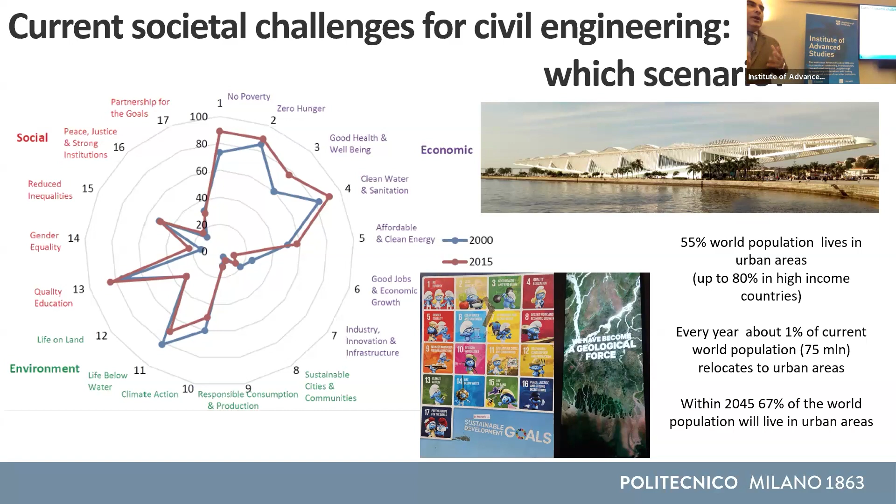And this means that we will require buildings for dwellings, infrastructures for transportation, for moving, and any kind of structure and infrastructure that we need for our daily life. And as a matter of fact, this started quite some time ago. This is the road network at the time of the maximum expansion of the Roman Empire, during the empires of Trajan and Hadrian in the 2nd century after Christ.

And last year in the New York Times, there was this picture. This is a highway junction in Houston, Texas. And this is Siena, a medieval town in Italy, in the picture at around the same scale. So Siena fits in that same space.

Transportation is a big issue. We did not realize how important it is until we were stuck. We were forced to stay at home during the pandemic, or when the Suez Canal was blocked by a ship. And I remember in Italian newspapers it was written: this year at Christmas, no toys, because the ships are blocked in the Suez Canal, and all the toys came through that channel. So this is really something important.

Why did I add the Pantheon? Not just to match with the Roman thing. I always use this picture to address one concept, because when sad accidents happen, we read, oh, the Romans were able to do concrete very well, look at the Roman bridges, and so on. But I used to say that the concept of durability of a material does not exist. We use a material to make a structure. So durability makes sense only if you think of the material in the structure and where the structure is.

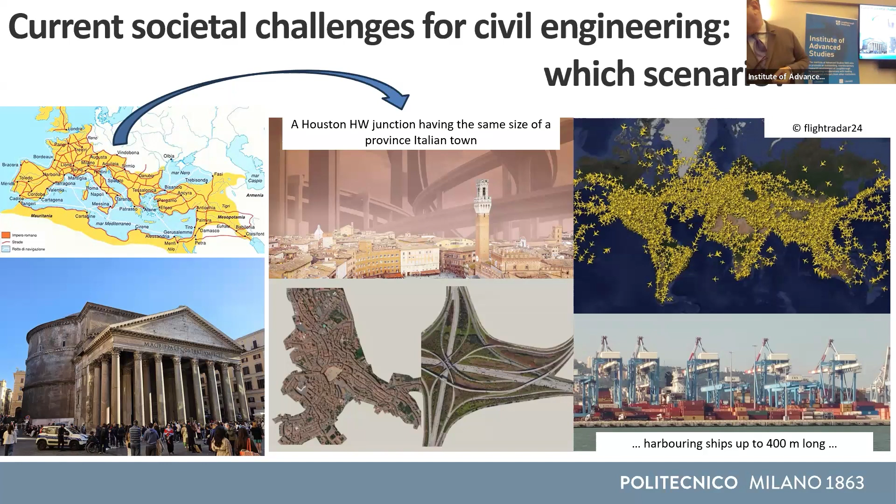But anyway, in this context, whatever the message is, we cannot avoid concrete. Concrete is a fantastic building material. Our need for concrete means that we need to quarry, we need to produce a lot of raw materials, we need to produce cement, and this is a process which has an impact. But really, we should not believe that we can have a real alternative to concrete.

Our colleague Karen Scrivener from EPFL made a study and realized that if we would like to replace all that we do with concrete with timber, we would need a forest surface like that of India every year, which means that we need to replace it.

And the other thing is, sadly, the fires in LA demonstrated that concrete can survive fire. Timber is a different thing. You can design a timber structure so that people survive and can escape, but after that, the building itself becomes part of the fire load. But about concrete, there is a misperception, in my opinion, because we know that concrete is made of cement and cement has an impact and so on. But there was a study.

This study is not very new. It's 15 years old, by a Brazilian group. And they put the compressive strength versus the binder consumption. It's well known that to have a better concrete in terms of strength, you need to put more binder into that, more cement. And the conclusion at this point will be, okay, a better concrete will be more impactful. So let's build with a less powerful, less strong concrete.

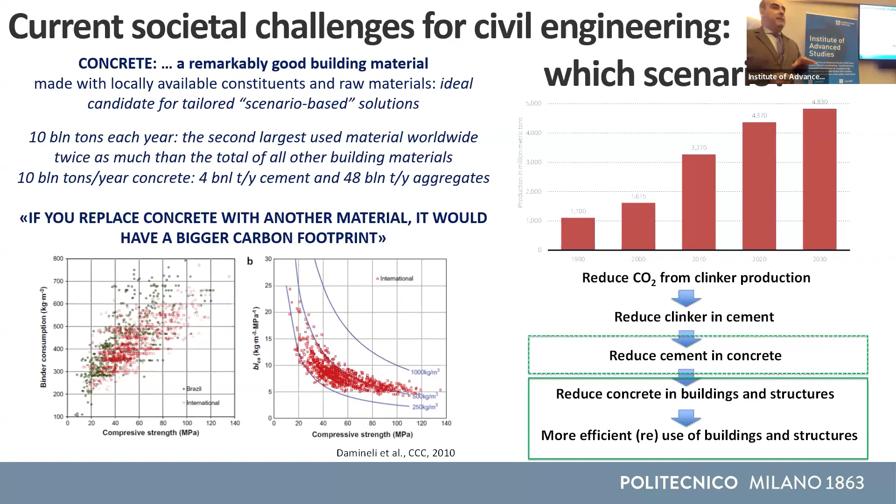We can reduce cement in concrete. We can make concrete with lower cement content. But most of all, if we are going to use concrete with a higher strength, we can reduce the amount of concrete that we use in our structure for the same performance or for even better performance. So this is the context in which we started. These are the topics which I will go through.

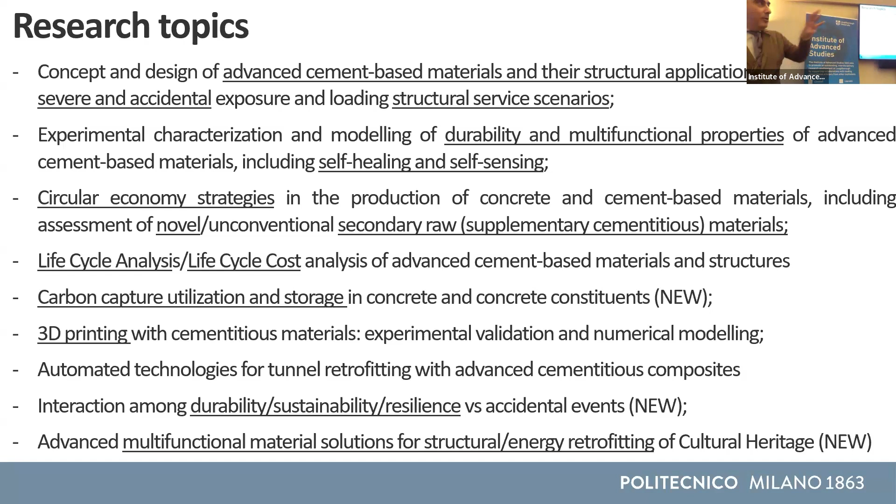We started with this idea in mind with the ReSHEALience project, and we said we want to address product, process, context. Product is UHPC, is well known on the market, and it's advertised for its high compressive strength. At a certain point, I say, from a structural engineering perspective, this higher compressive strength becomes useless because you cannot squeeze the size of your columns below a certain limit because it's no longer a matter of strength, it becomes a matter of stiffness and buckling. And the two properties are not proportional. So what you look for from UHPC is not only strength, it's toughness. And you have to upgrade this to the process.

The other movie was when we cast half a cubic meter of UHPC on a real job site with basically unskilled workers, because that is the way to go. Construction industry is made of medium to low skilled workers. So you need to upgrade their skills if you want to really make the innovation breakthrough.

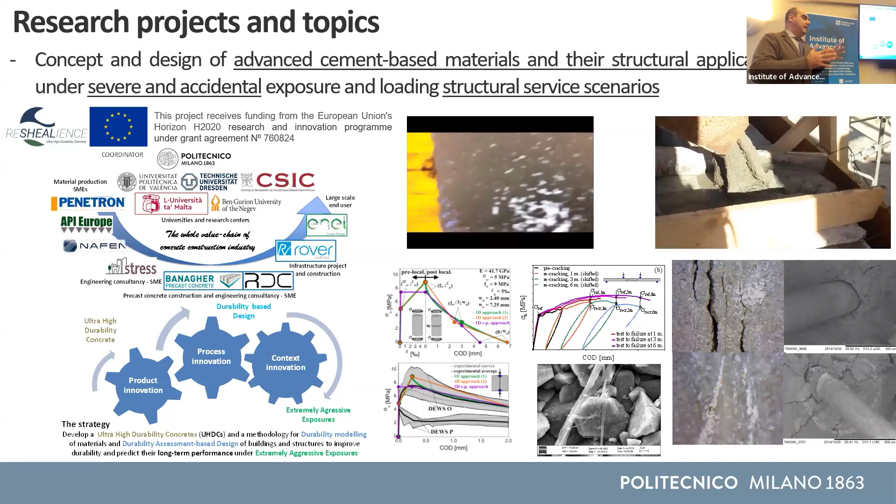But what we wanted to look into, and Anna mentioned it in the introduction, is the self-healing capacity. This is how these materials, because of their composition, because of their engineering mix design, are able to self-heal the cracks, provided that they are in a good environment, which means that there has to be some moisture, basically. So this was what we looked into, and this is what we proved in a job site. This was one of the pilots in our ReSHEALience project.

Very simple one. It's a swimming pool. We use geothermal water. It's not thermal. It's not a spa. It's a water which contains sulfates and chlorides, so very aggressive. But going from ordinary concrete to UHPC, we reduced the thickness from 10 centimeters. You can see inside this is about a 1.5 meter wall, so not very demanding. From 10 centimeters to 3 centimeters.

The other important thing is that the reduction to 3 centimeters was allowed not simply because we changed the material, because if you limit to the material, you go to 6. We changed also the structural concept, not a cantilever wall, but plates connected by, we call them buttresses, because we wanted to remind us of the Romanesque architecture, because really these slabs transmit a thrust to these columns here.

So we changed the structural concept, going to a slab, because the slab is a redundant structure. It can redistribute stresses, it can exploit the properties of this material. So even if, in the mix design, if you look at the cubic meter of this material, you have more cement than in ordinary concrete. But if you compare the square meter of a wall, you see that in this case, 1 square meter contains 35 kilos of cement. In this case, it contains only 18. And even if you add slag, which is a supplementary cementitious material, the sum is still lower than that.

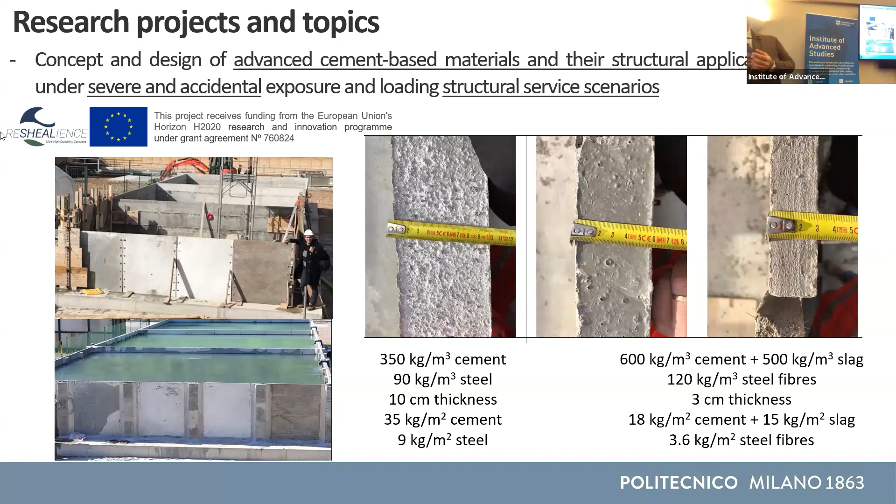So this is the way to look at the use of ultra high performance construction materials, whatever they are. So, okay. The other thing is, okay, we have these materials, but we need to know how to design with them. There are guidelines in the international design codes nowadays, but when it comes to durability, the codes are a little bit lazy on this. The codes on durability are prescriptive. They simply recommend a minimum cement content, the maximum water cement ratio, and ultra high performance materials automatically satisfy this. So how can you compare the benefits if they are all above the threshold?

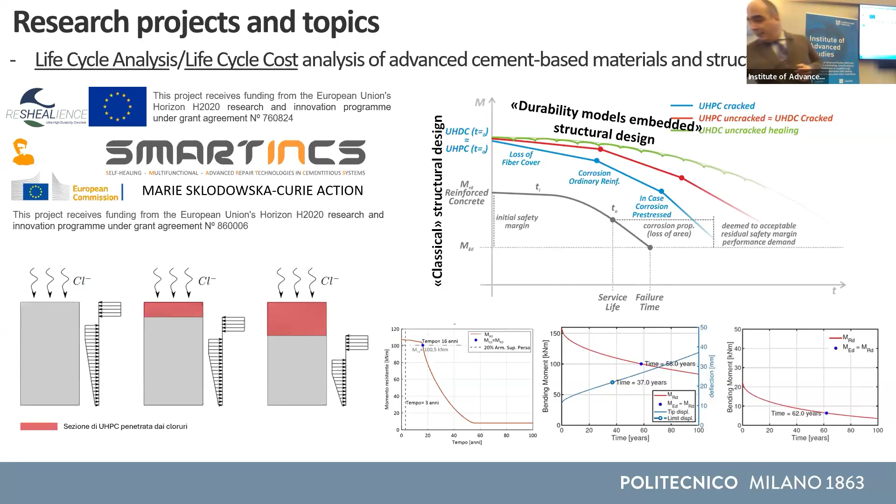So we developed the methodology. In this sense, the multidisciplinarity was quite nice because we were discussing with people in timber design, and we were discussing about fire design. When you design a timber structure for fire, you calculate the time and you calculate how much thickness of timber is burned in that time, and you remove that thickness from the cross section. So we said, let's do exactly the same. If the chlorides penetrate, let's remove that from the cross section, which is a little bit harsh, because then we went and we tested the materials.

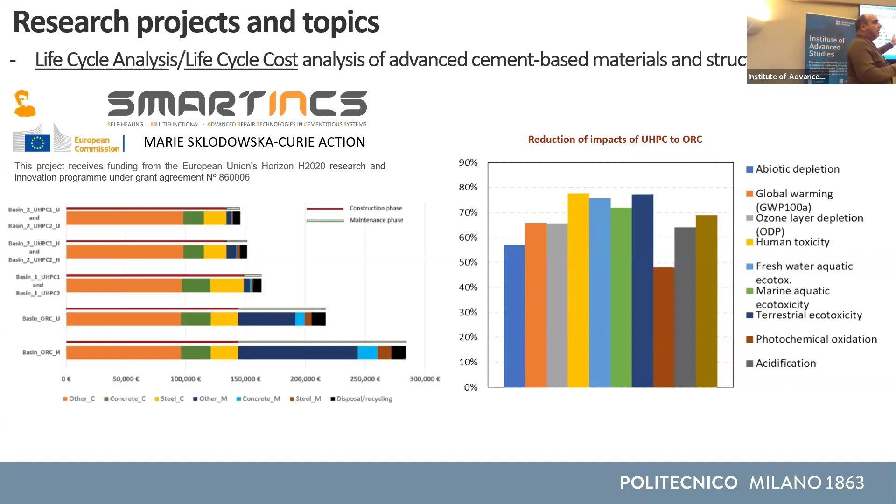But what we wanted to demonstrate with that is that due to that reduction in volume, the construction costs, which are up to here, orange, green, and yellow, in ordinary reinforced concrete or in UHPC are more or less the same. So this is important when you go to real industrial application. You cannot say, oh, we'll save money 50 years from now. No, the return on investment must be reasonable. Otherwise, the innovation will not go to the market. So in that case, we managed with the design to have the same construction cost, and you greatly save on maintenance because of the higher durability.

How can you predict the maintenance? This was the other issue. Most of all, because you use UHPC in most cases without ordinary reinforcement. So if you think of the model for corrosion, you do not have a bar which corrodes there, so you cannot apply this model. So we investigated the long-term performance with experiments and modeling. I will not go into the details. We also used a little bit of AI, because we had a good database of, I think, more than 750 cracks that we could scan. So it was a good database to train our own model. The paper was just published yesterday. Our student was very, very happy about that.

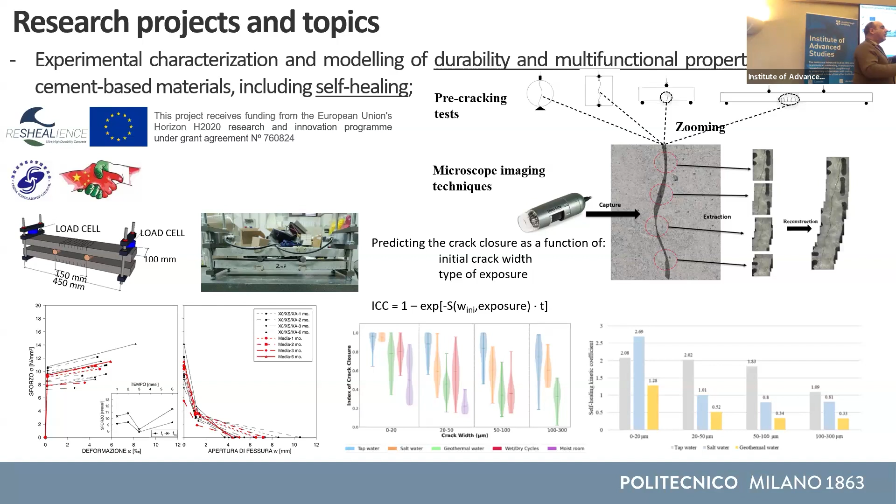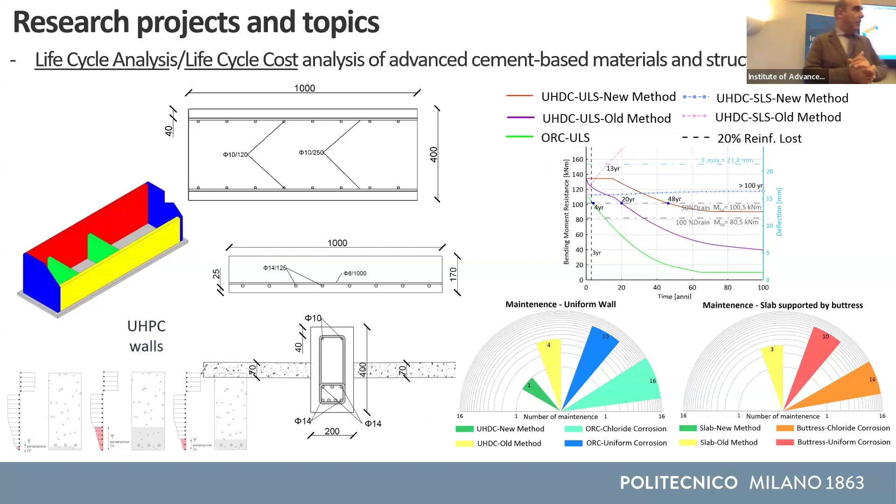So we developed a crack closure law, and we used this in the models, and through the evolution of the performance over time we were able to track the maintenance. So, for example, for the structure with the slab supported by buttress, if we used our approach, we had no maintenance or a maximum of 3 maintenance interventions compared to 10 to 15 in an ordinary reinforced concrete structure. So this was the methodology that we developed to calculate the cost.

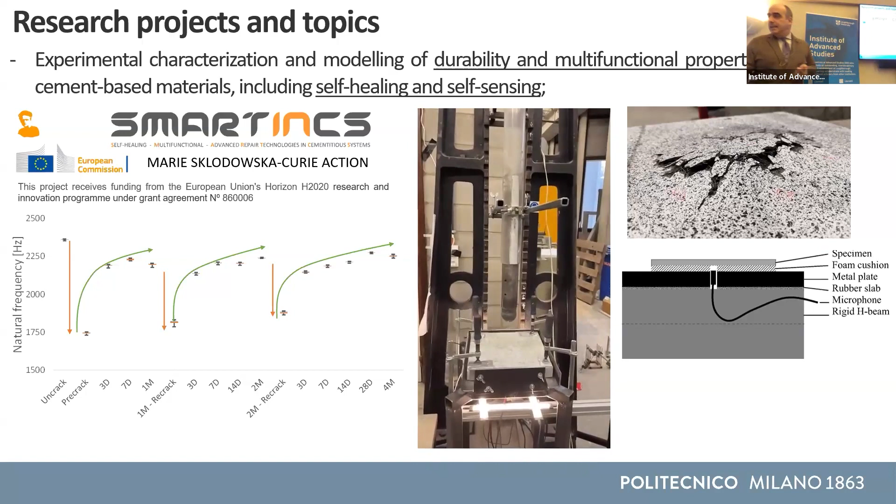And then we went further. For example, we investigated how these properties apply to impact, if you want to use them for protective structures, how the material is able to recover its properties, and how these materials survive higher temperature. This is particularly important for nuclear containment secondary vessels, which can be subjected to up to 300 degrees constant temperature. It's high, but not extremely high. So the material still keeps its performance. We heated the material up to 200 degrees, these ones here, and after curing them for 3 months, the material was able to close back the crack. So it's able to survive with this activity.

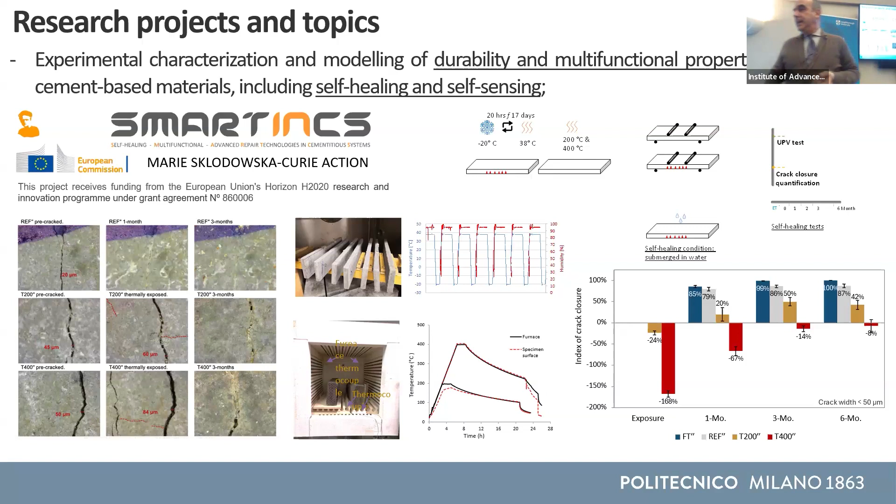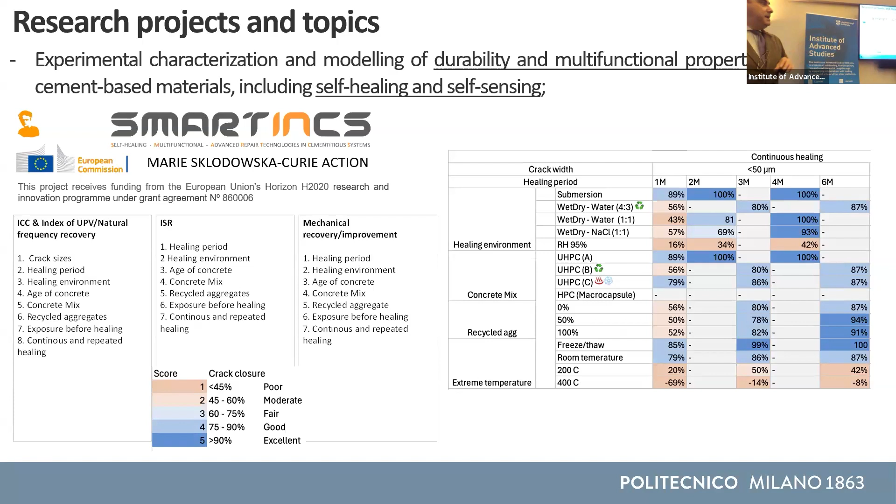We investigated freeze and thaw as well, and we tried to come up with a design matrix to address the choice of the best material for the best application. Ending up, I spoke about nuclear, so the transition towards the energy world was a little bit natural. And we looked into, well, this was still the European Union with 28 countries, so this survey was before Brexit. This is the energy mix for all the European countries.

So we still depend, it's some years ago, we still depend on coal for 10%, but there are countries like Estonia and Poland which depend on coal for 40–50%. So how can advanced materials help in the energy transition?

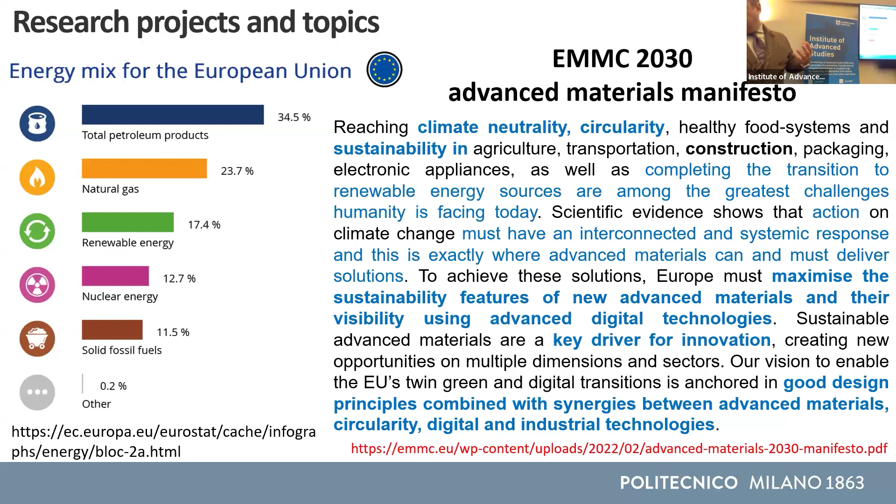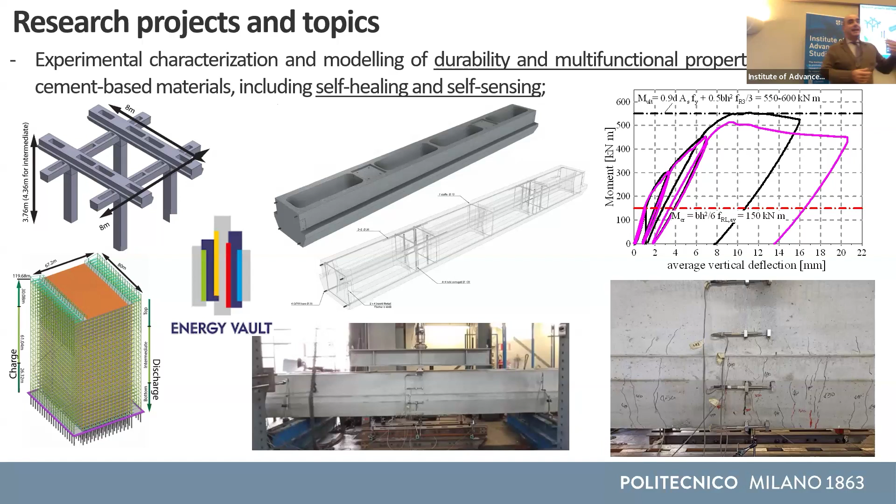So they ended up with this design here, which can only be made possible with fiber reinforced concrete, actually, because you can see here, you just have four regular bars, and some stirrups also here where the columns will be supported. Without fiber reinforced concrete, you cannot make this possible. You cannot have this design, and the fibers take up 50% of the total capacity. But obviously, in this case, you also need to deal with fatigue. You need to understand how these materials behave in fatigue.

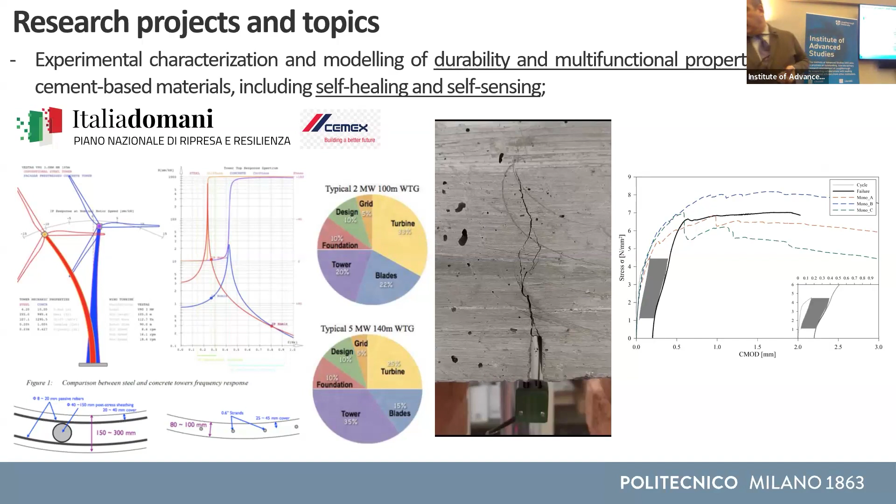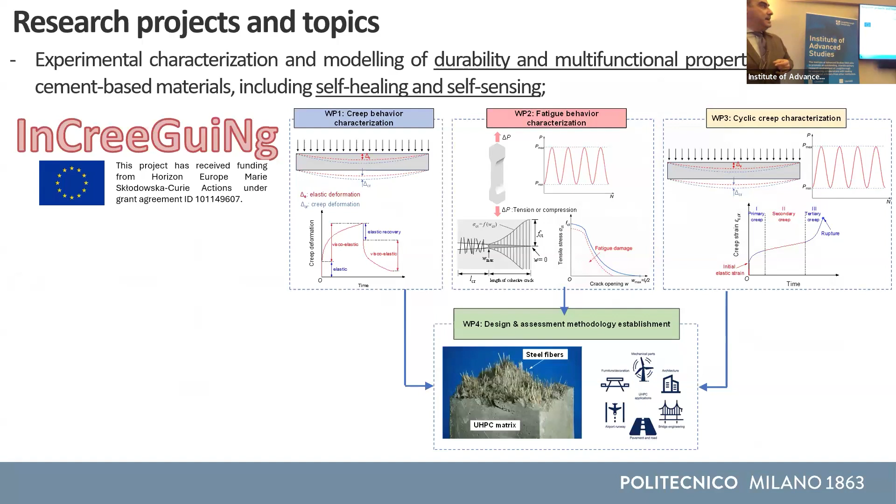So you see, we made some fatigue testing of the fiber reinforced concrete, because another application is wind towers. If you want to go higher to harvest better energy from wind, the problem becomes frequency dominated. So you have to uncouple the eigenfrequency of the rotor from the eigenfrequency of the structure. And a concrete structure is a good solution for this. So for this reason, we have also studied how this material can recover its natural frequency, its stiffness, and we are going to start in a couple of months. A Marie Curie fellow will come to Politecnico just to study these things.

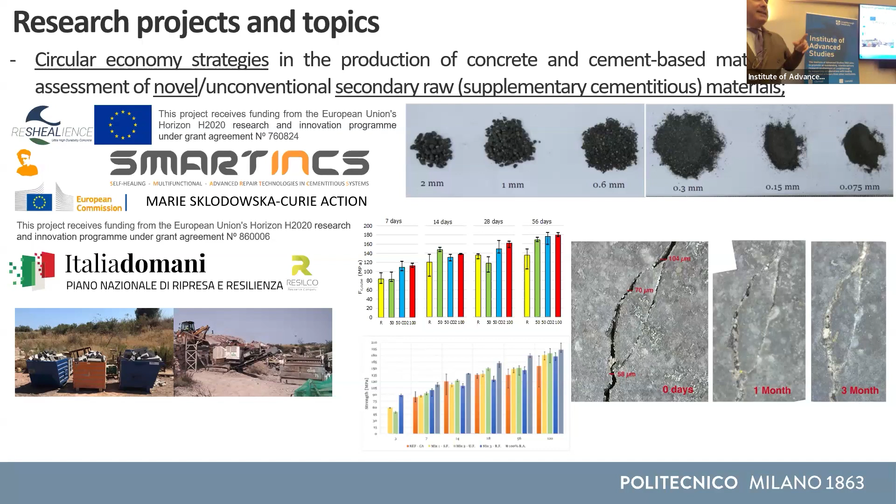Another thing was circular economy. I will not go deeply into that because Estefania will talk about this, but we investigated it in our project. We said, as a joke, we are a zero waste project. So we recycled all our specimens. We made new UHPC, and we demonstrated that it's possible to keep the performance, to keep the self-healing capacity, and if you have the possibility to recover the fines, also to reduce the amount of cement that you put in the new concrete.

But still related to energy, if we are going to abandon coal, we are going to miss an important constituent of advanced concrete, which is called fly ash. So we have to find alternative fly ash sources. Nowadays, steel is no longer produced from blast furnaces. We produce it from electric arc furnaces, and the slags are different. So are those slags equally good to be used in concrete?

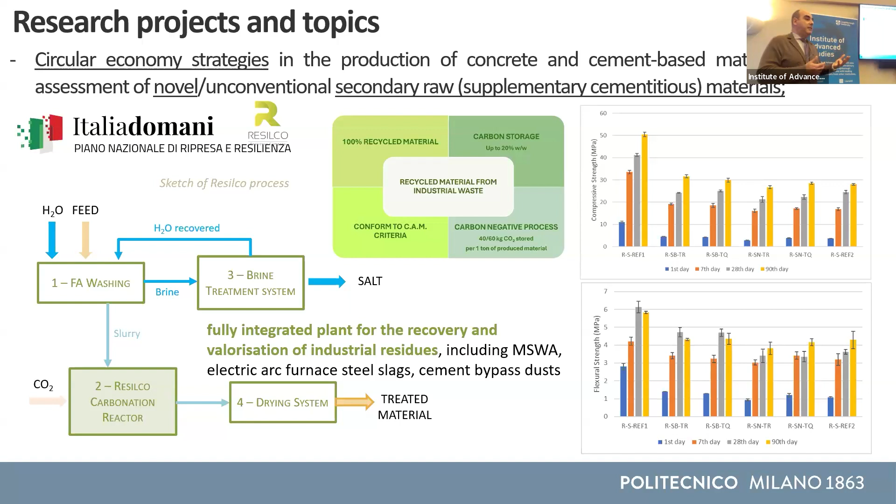So we have started this project with the company. They work with municipal solid waste incinerator ashes, and they use them also as carbon sinking. And the issue is that you need to adjust the properties, because they can be different from the conventional, traditional coal fly ashes that we are used to nowadays. And this also was dictated by, probably Estefania will speak about that.

What does energy transition mean? We were in this project funded by the Research Fund for Coal and Steel. There were Polish partners and also UK partners, University of Warwick, University of Exeter. If we close the coal mine, what does it mean? It means that we have to handle a waste stock like that. That is a mine near Katowice in Poland. What do we do with that material?

And there is also the handling of the subterranean cavities, because you cannot simply close it and go away and forget about it. If you don't use it, you need monitoring, Wi-Fi connection for the wireless sensors that transmit the information and so on. So we try to recover these wastes. There are problems in handling those wastes. They are naturally occurring radioactive materials, so you have to understand how to handle them, how you can recover them.

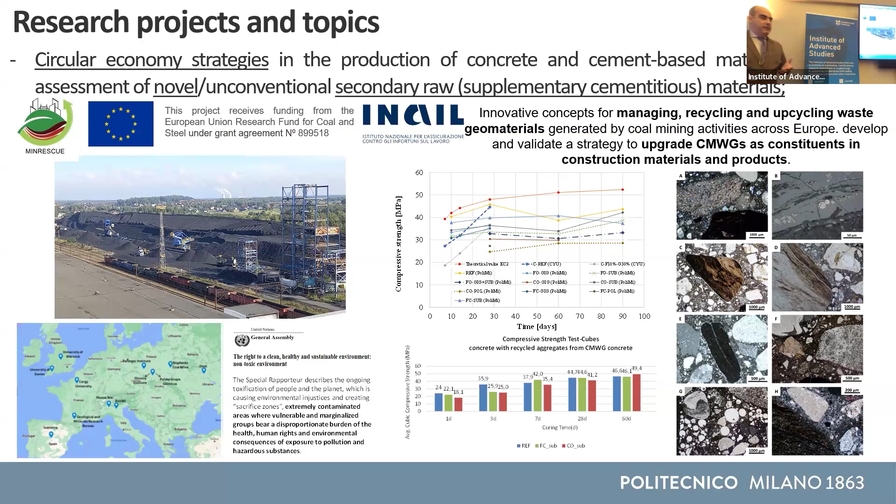But we realized that if you lightly cement them first, and then crush this mixture and use it as aggregates in concrete or in road bases and so on, they give you a good performance. So this was a possibility that we have.

Another project we are involved in is with this company, Resilco, which is partially funding a PhD position, on the carbonation of the slurry, because it's a way in which you can really control the carbon dioxide that you inject and it remains fixed, because in most of the processes that are nowadays advertised, you know what you pump in, but you don't know what goes out.

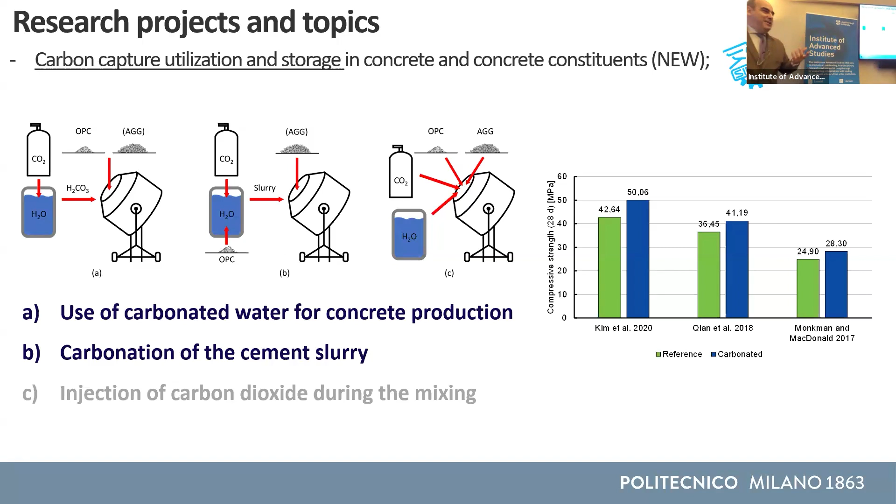If you have sparkling water and you slightly agitate it and you release the bottle, your carbon dioxide goes away. I always do that because I don't like too much sparkling water, so I want some carbon dioxide to do that. And then we also went into 3D printing.

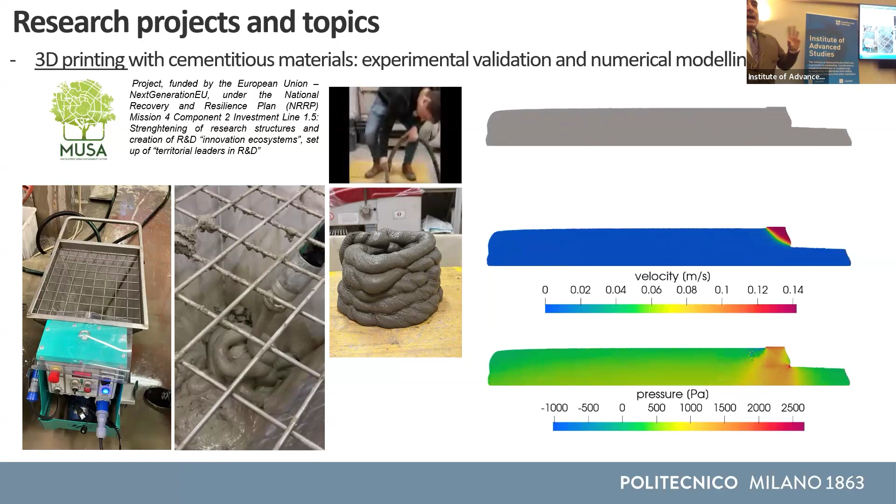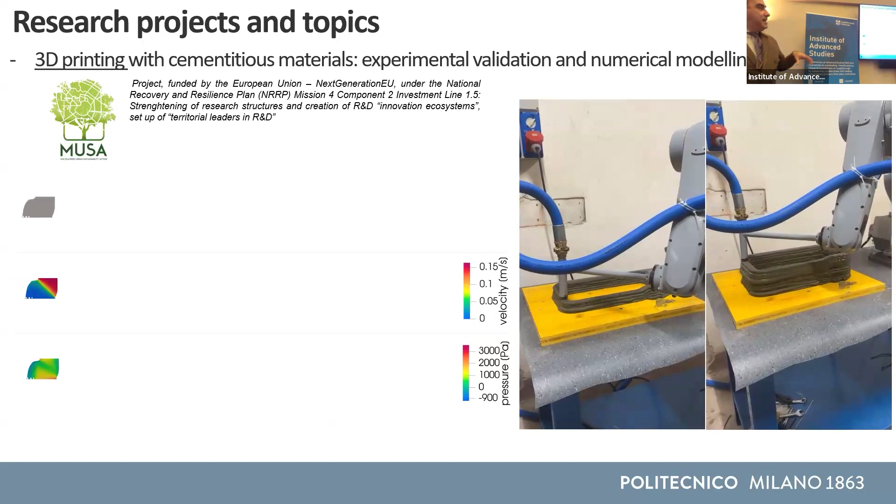Our early attempts were obviously a little bit of... develop a particle finite element based codes to model and design the engineering printing process. And finally, we were able also to set up our own 3D printing lab. First nucleus was a robot, but we kept on developing our 3D printing tools.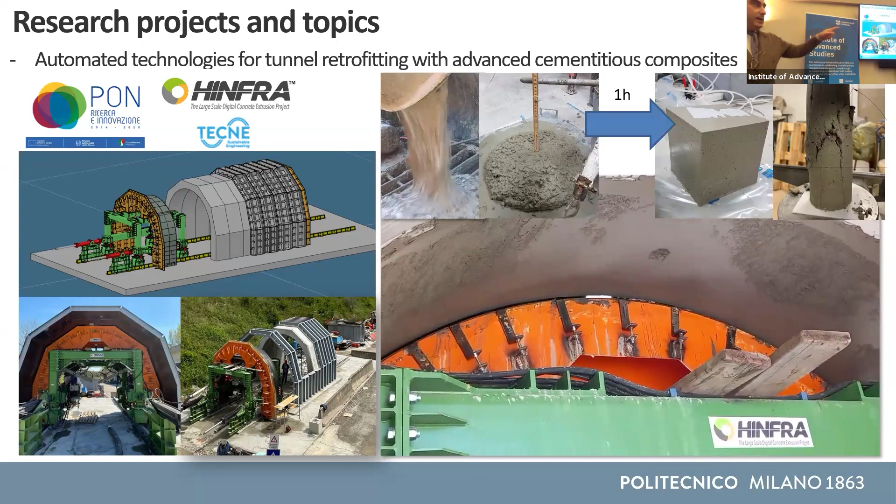There is this slip forming unit. You pump at time zero a self-compacting fiber reinforced concrete mix, and after 1 hour you are able to slip form. So the vault is able to withstand and develop a compressive strength of about 8 megapascal in 1 hour in order to be able to stand that.

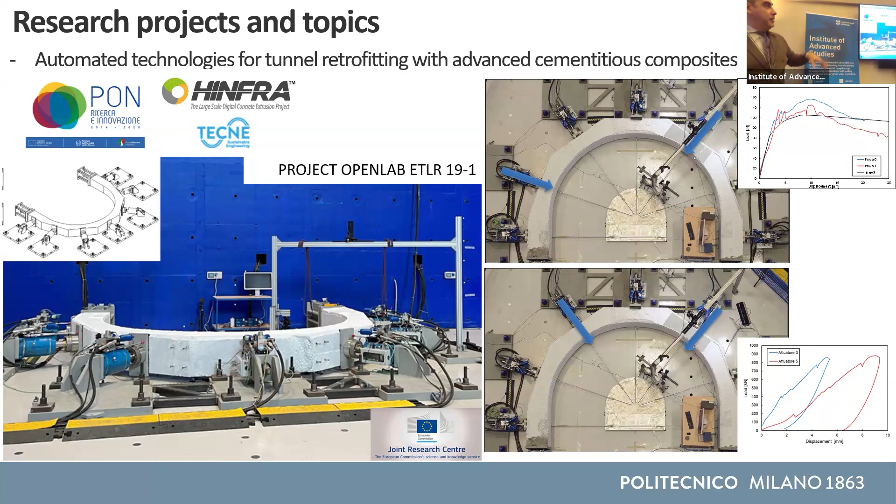And in order to bring this to the real application, we had to validate it with real scale testing. So these are 5-meter diameter mock-ups of tunnel vaults that we tested in different load combinations in the JRC lab of the European Community near Milan. We analyzed the cracking. This is only fiber reinforced concrete.

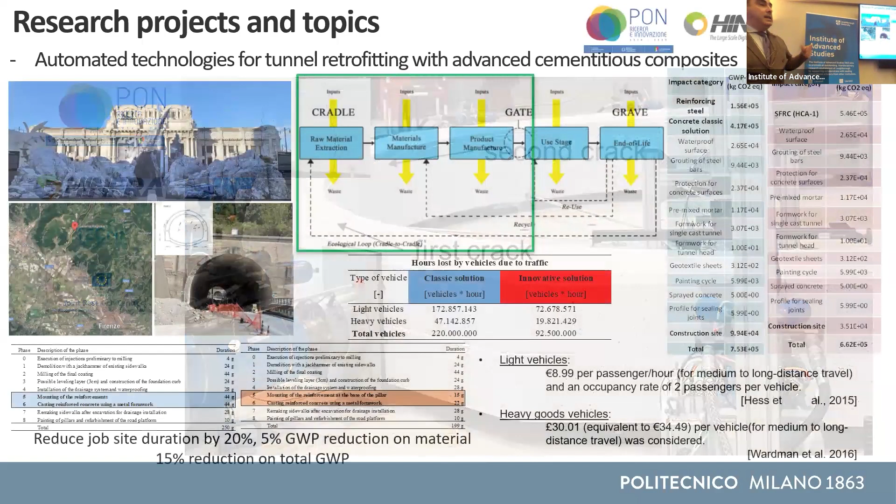And we went to a real site. This was about a 150-meter tunnel on the highway. We demonstrated that using this technology, we saved 2 months on the construction site time. The material was not so dramatically different in terms of impact, because you see, if you compare the global warming potential of this material, and you sum up concrete and steel in the classic solution, you have a saving which is about 5%.

And sometimes if you go for 5% saving, you say, oh, is it really worthwhile, all this complicated process. What was interesting was that over 8 months, we went down to less than 7, or just 6.5. So this saving was the key driver for the innovation, because for a stakeholder, okay, you close the highways 2 months less, you keep the workers 2 months less on the road, you avoid 2 months of vehicles in the

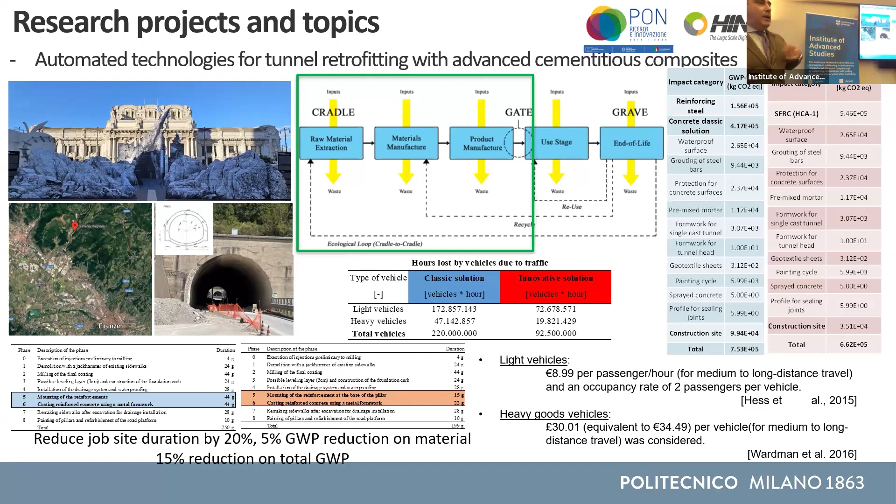queue and so on. And nowadays, what we are trying to understand: can we correlate to the rate of fatal accidents that are on a highway because of the reduced construction site? So the social impact of the innovation in material and in structural engineering. These are the last slides.

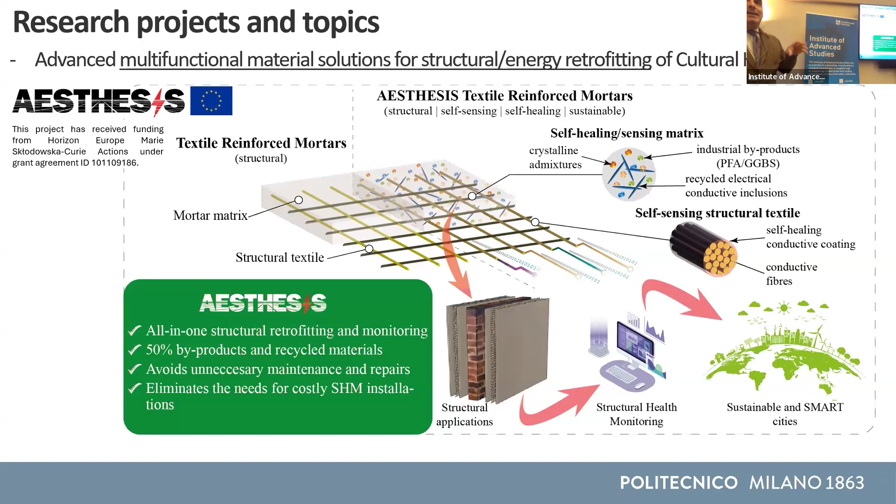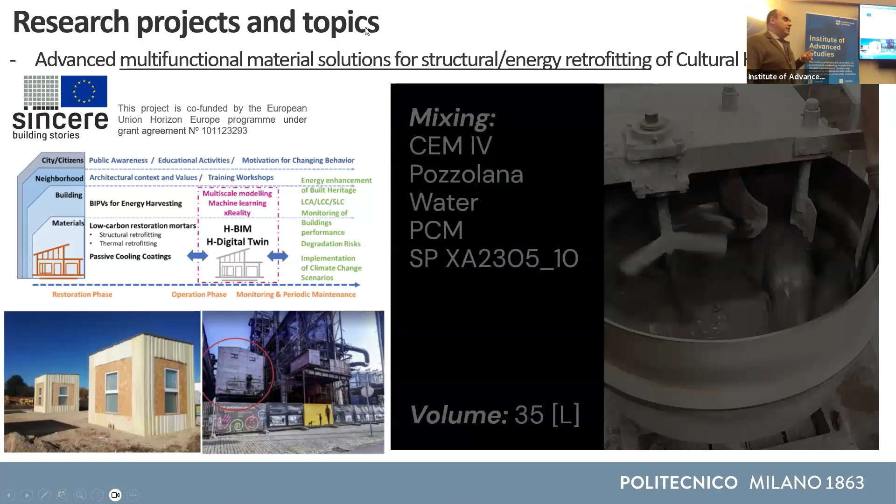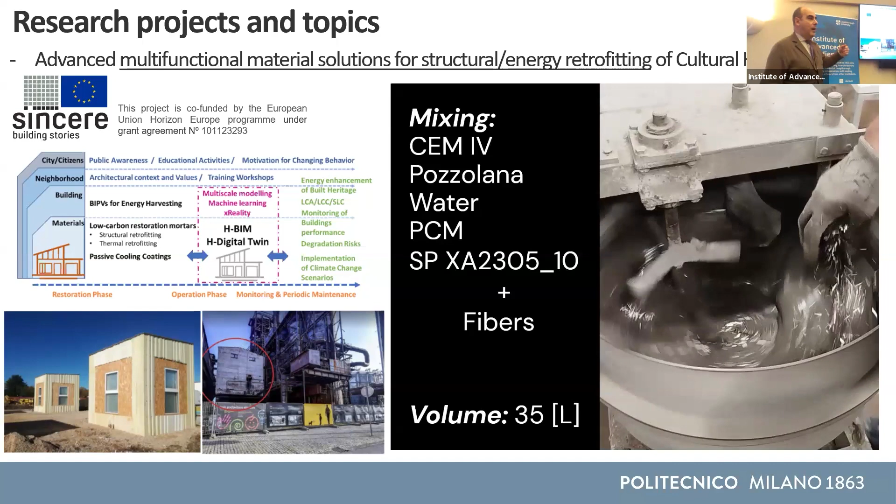We are trying from that experience now to embed in our retrofitting material self-sensing capability, so providing some conductivity to the material so that the material itself becomes a sensor. And we are now going to produce these materials, these UHPC, using CEM IV, using natural pozzolana, using amorphous alloy fiber, so trying to go lower on the embodied carbon footprint from the material, and try to incorporate phase-changing materials. We want to use this in the retrofitting.

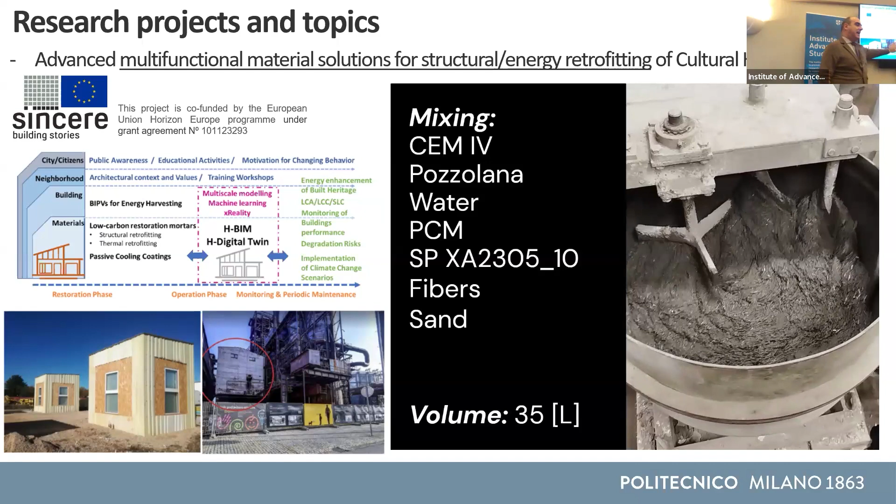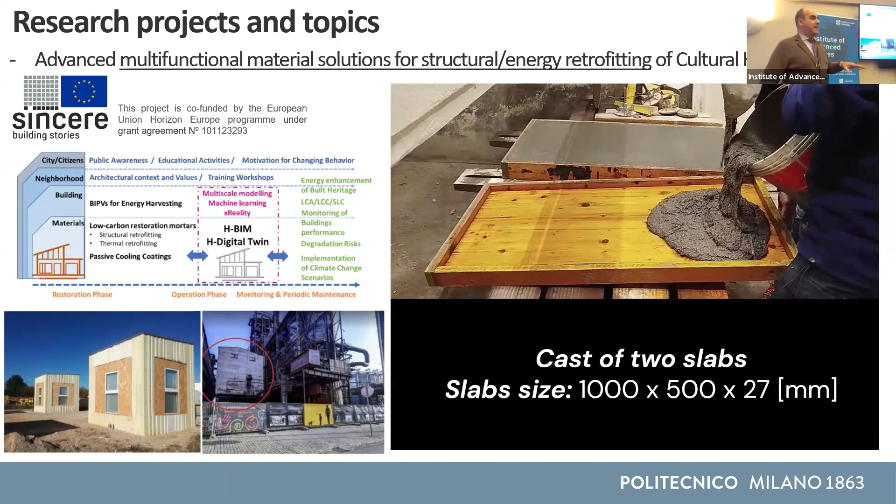This is a fantastic site in the Czech Republic. Ostrava was the oldest blast furnace in the Habsburg Empire, and it produced steel for the Trieste naval yards. So the story is fantastic. There are some buildings which date back to the early 90s, which are in concrete, that we want to retrofit, and we are going to test them in these houses.

These are in Madrid from one of the partners of the project. So we want to mix up the concept into that, and the movies from the first experiments that our students did in the lab. Going to retrofitting and to new material, I think this is the very last slide, or more or less there. We had a case study.

This is a water treatment plant in Genoa. It's located here. The airport is here, and this was a former steel factory now abandoned. So the environment is close to the sea. There is acid attack from the environment. So it's a multi-attack exposure site.

We use advanced materials for the design of this water treatment plant. You can see there a structural model. But what we wanted to understand is, if we use better materials for this structure, which has a longer durability, then we try to predict how the durability changes the structural performance, how this structure will respond to an accident like an earthquake with a certain return period, and what this better performance means in terms of the survival

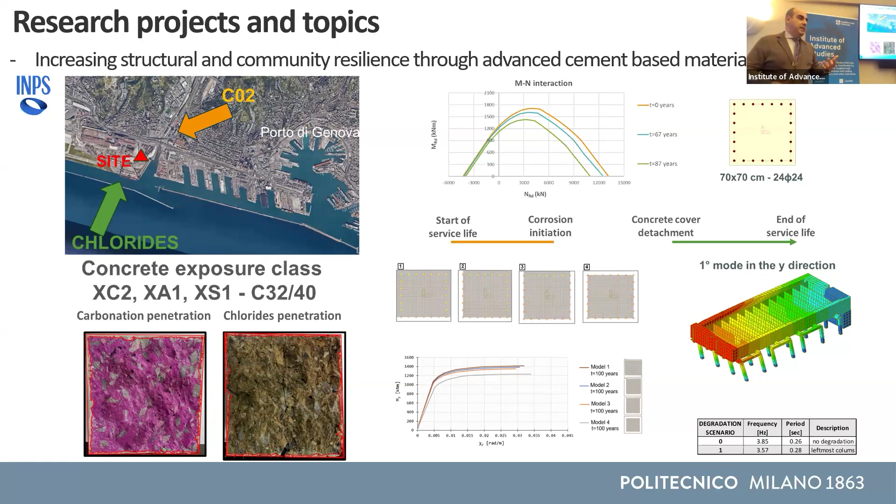capacity of the structure, and then, and this is the point where we are now, how does this impact the promptness of recovery from the disaster of the whole community? Because this is a water treatment plant, so it will affect the possibility for a community which is hit by the disaster to have this essential service.

Well, this is all on the technical part. There is also the social part. We went to the first New European Bauhaus fair some years ago in Brussels to showcase some of our innovations, and these are some pictures of the research group at the last RILEM Spring conference that we held in Milano in the former stock exchange place. These are some pictures from the project meetings that we had in the past in Valencia, Milan, that was Athens, I think that was Paris there.

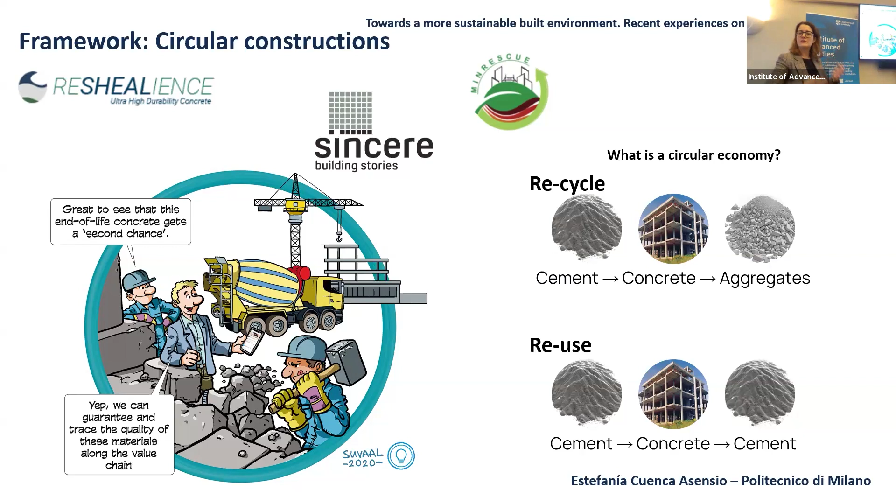but in a sustainable way. So what we can do, for example, in a framework of circular economy, we have worked with these projects, ReSHEALience, SINCERE and MINRESCUE. So we can recycle and reuse. So we have cement and we produce concrete, and then from concrete we can get aggregates, or also we can reuse this kind of concrete to produce cement, crushing the concrete and proceeding with the sieve and so on. So let me explain to you a couple of experiences in terms of that.

So, we started with the European project ReSHEALience, producing an ultra-high performance fibre-reinforced concrete, and obviously, as you can see here, with the reference mix, the amount of cement is really high. But in terms of sustainability, we are using a lower volume of concrete. So it's interesting on this side. We have produced several kinds of mixes, as you can see, the 50 and 100. And what does it mean? It's that we have produced concretes replacing part of the aggregates.

So, for example, in the reference mix, you can see that we have used around 800 of aggregates per cubic meter. But in this case, we have replaced half of the aggregates with recycled aggregates. And in this case, all the aggregates have been completely replaced. But today I want to focus only on this, because it is particularly interesting: we have two mixes and we have also reduced the quantity of cement. So in terms of sustainability, it's really interesting because we have used a lower quantity of cement.

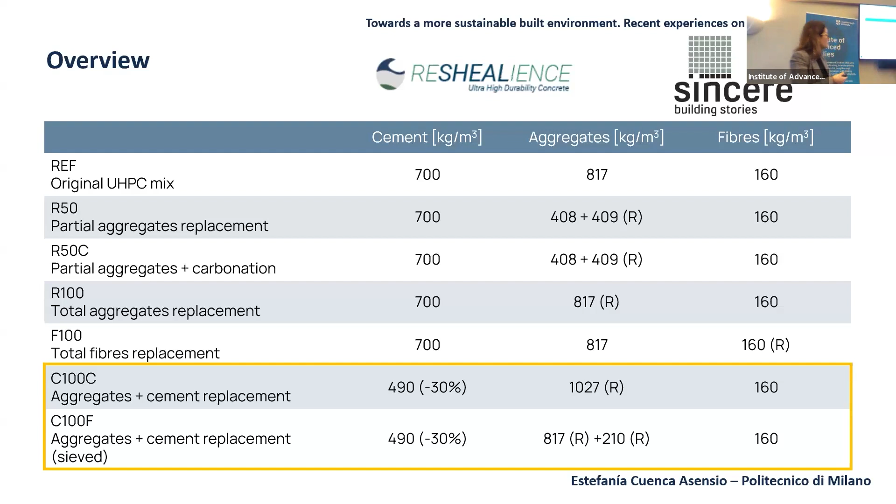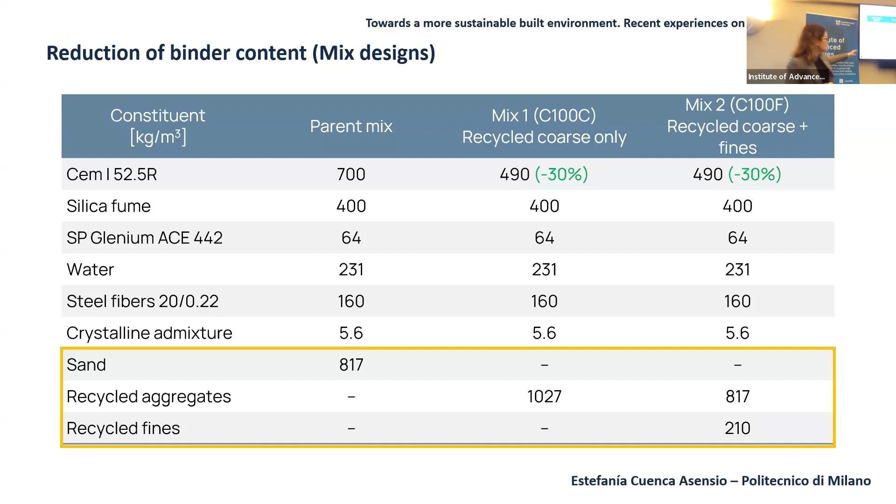So here you can see the mix design of these two concretes. And here you can see better the quantity of sand, the recycled aggregates, and recycled fines with reduced binder. And this is the experimental program. I'm trying to explain in a way for those people that are not so familiar with these things. Concrete has the ability to repair itself, that is self-healing, and self-healing is really interesting in terms of durability because by repairing itself, the maintenance over time of the concrete structure is less, so it's more sustainable in this sense.

So, to study this, what we do: concrete has this property to repair itself, so we pre-crack the concrete and we observe in two views. First, how the crack seals and repairs, but only on the surface, by means of a digital microscope, taking pictures before and after the healing curing periods.

And also we perform another test that we call the sorptivity absorption test. This is particularly interesting because it allows us to analyze and quantify how the crack is cured and repaired in depth, also in the inner part, not only on the surface. And for sure it's also particularly interesting from a mechanical point of view.

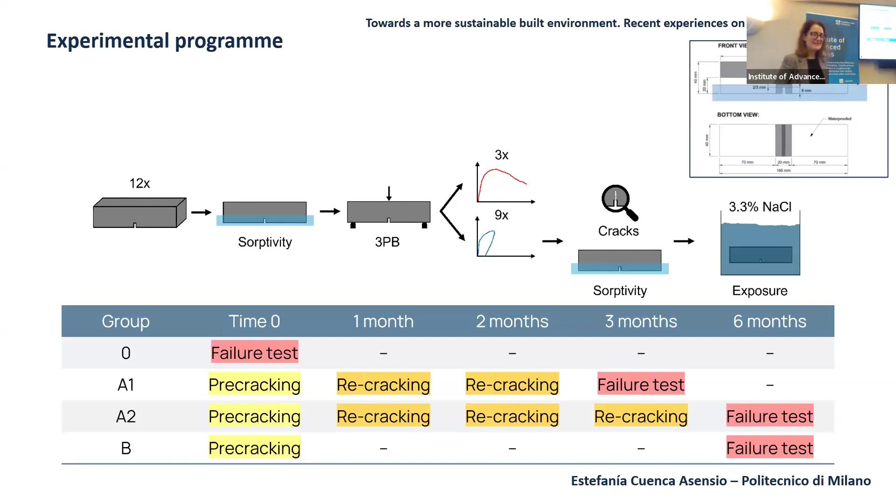So we analyze another process: we pre-crack all the specimens with a classical 3-point bending test up to, in this case, 150 microns. Then we immerse the specimens in a chloride solution in order to promote the self-healing in a chloride environment. And after 1 month, we recrack again. Then after 2 months, recrack again, 3 months, recrack again, and also at 6 months. So a lot of recracking. And how does it work?

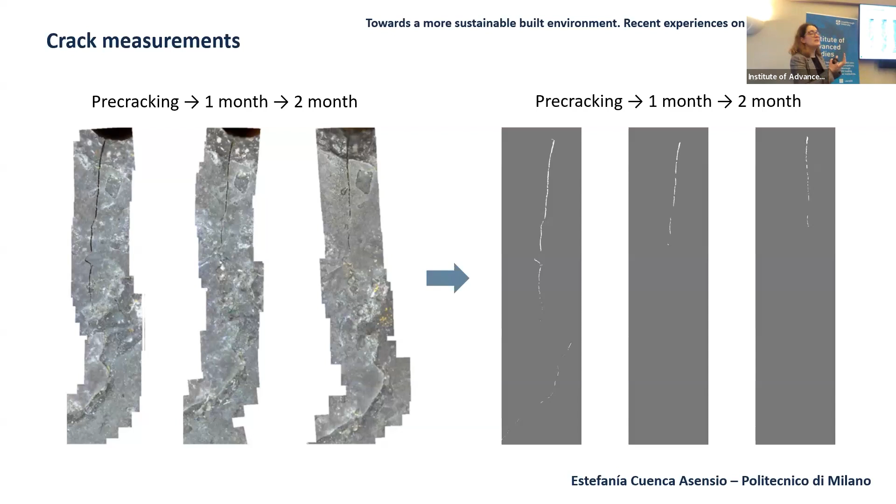So, we take pictures with the digital microscope, and we merge the images with Photoshop. And here you can see the evolution of the crack. This is completely open because it's just after pre-cracking, then after 1 month and after 2 months. And then with binarization, quantifying the pixels, we have the area after pre-cracking and after several healing periods.

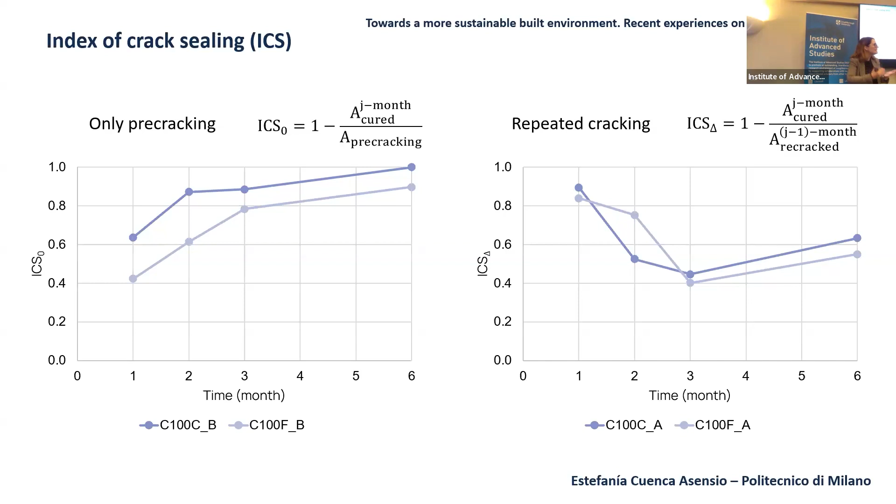As we expected, on the right we can see the graph of the evolution of the repeated cracking. If we are repeating this process, cracking, healing, the behavior was worse. And this is quite interesting also because here after 1 to 3 it is decreasing, but then we have a slight increase. Why? That's because we have 3 months of curing, a not so short period of cracking healing.

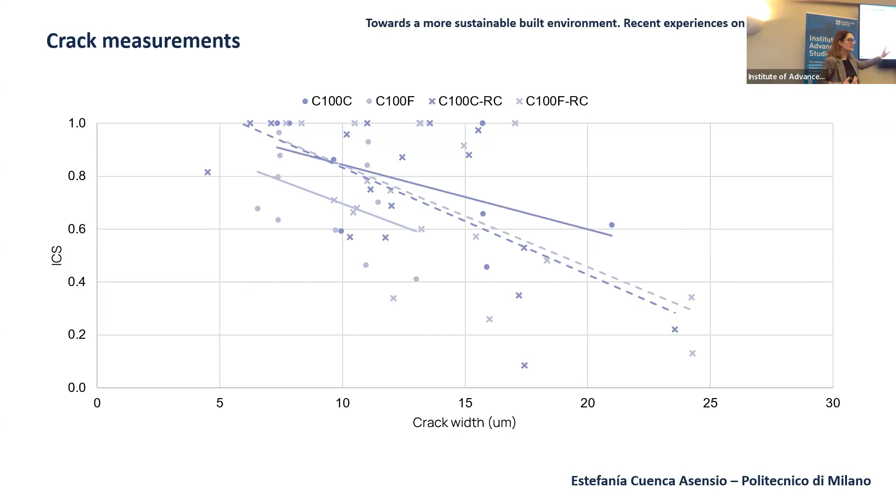This is another perspective of the same mixes. We have the index of crack sealing compared to the crack width. Obviously, self-healing behavior is better when the crack width is very thin, and the index of crack sealing is lower when the crack width is higher, as expected. This is in terms of sealing only at the surface, but what happens in the crack depth, regarding the inner part of the crack, is it repaired or not?

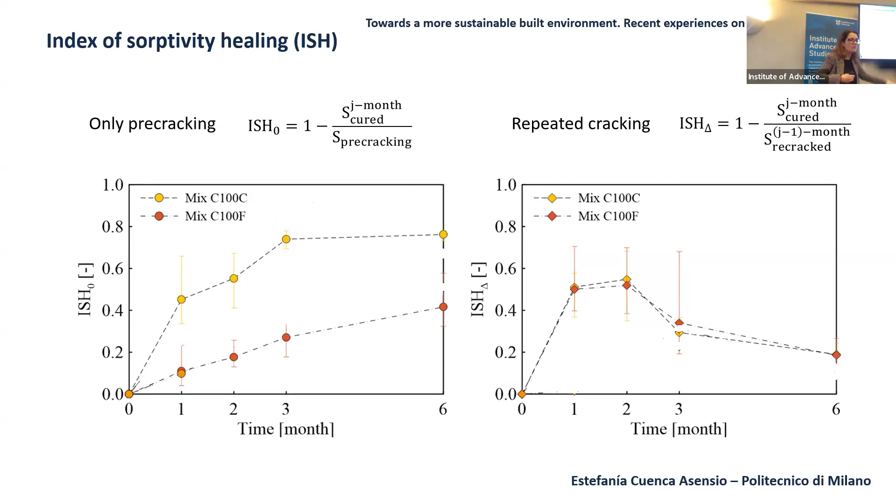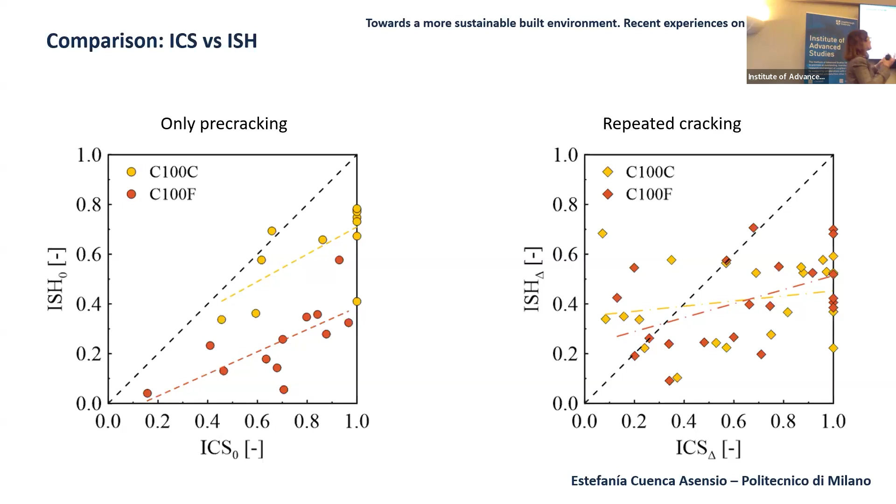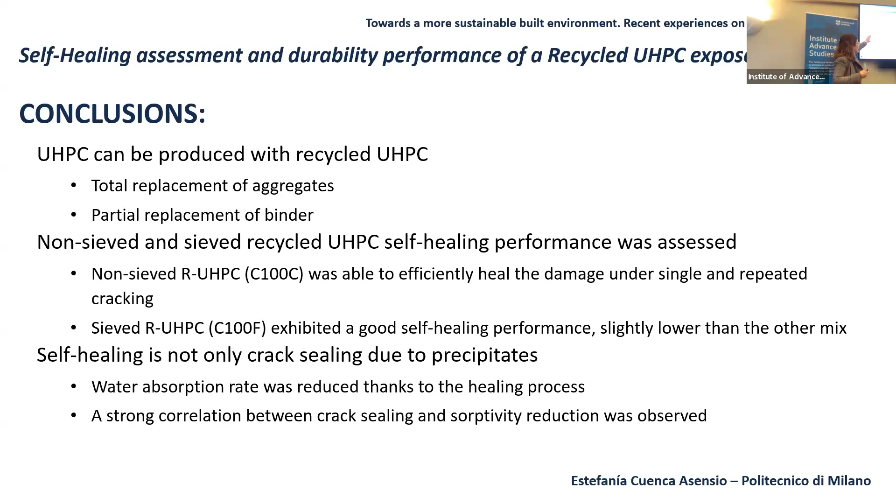But what happened with repeated healing? These points are randomly distributed, so there is not a clear tendency, but in this case the healing rate is constant, so it's not so good when it is repeated or over a long time. So, conclusions, more or less I have explained them. I think it's better to move to the other experience.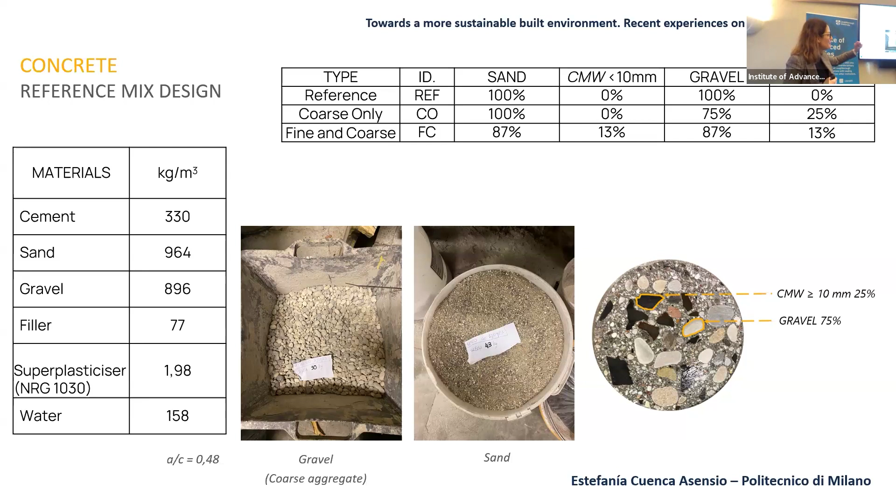Okay, these are the materials, and here on the right, you can see a cross-section of a cylinder of a mono-recycled concrete, and you can see the black ones that are the coal mine waste used as aggregates. Well, in this table, you can see also the compressive strength test. Just to be familiar with the identity that we have used, M is mono-recycled, B recycled, this is coarse only, this is fine and coarse, and the last letter is the provider, Poltegor, Subterra from Poland or Spain.

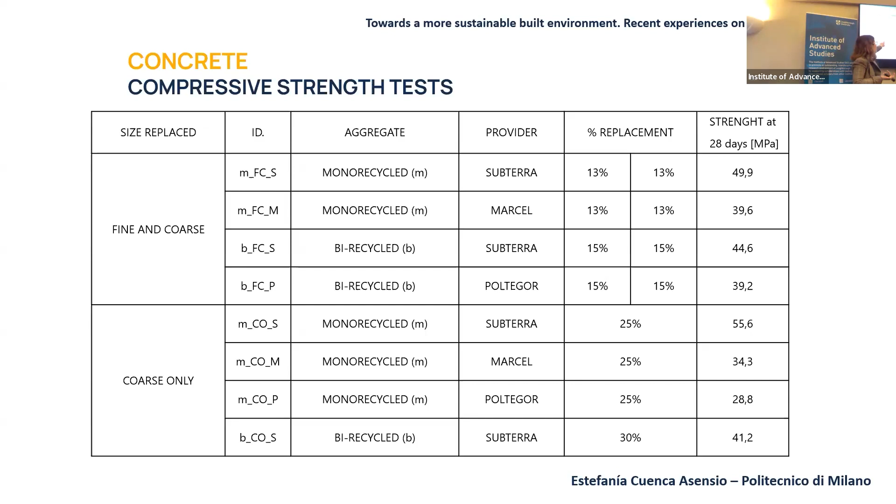And the conclusions we are going to analyze, but the behavior depends on the providers. It depends on whether it's mono-recycled or bi-recycled, so let's move on very quickly. You can see here in the column provider, the rate of replacement for each mix. And as you can see in the last column, the compressive strength was pretty much the same. Only in this case, we obtained the highest value for the mono-recycled coarse only from Subterra.

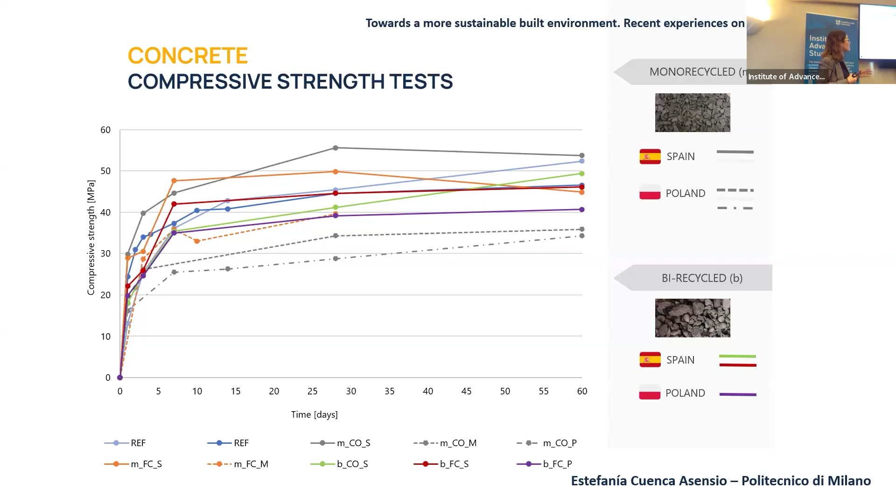But for example, the green one, that is bi-recycled, double recycled coarse only from Subterra, was a little bit worse in the early stage, but then it was increasing, maybe because we need more time to hydrate the cement particles and so on. So in this case, the green one was a little bit worse, but then we have a good performance after 60 days.

Also, we analyzed a lot of properties. For example, we tested these concretes against chloride penetration. We made cylinders and waterproofed all the surface. The flow of water with chlorides, to simulate a marine environment, was only from one side. That's why it's a unidirectional flow of the water, and then with a cross section of the cylinder we can observe the progression of the penetration of chlorides inside the specimen.

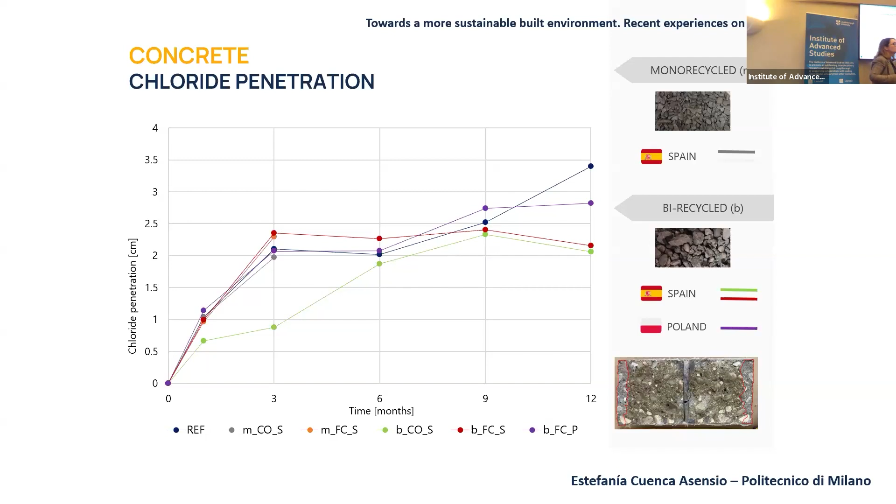So, as you can see, this is chloride penetration, and the better behavior in our case was double recycled, B recycled with coarse only from Subterra, and this is at 3 months, in the early term. But then, because we monitored the behavior of these mixes during 1 year, after 1 year we have the best behavior for B recycled, coarse only, and fine and coarse, always from Subterra. Subterra seems to work better in our case.

Also, we performed a carbonation test. As you know, concrete exposed to the external environment, due to carbon dioxide and so on, can carbonate. And here you can see the evolution of the carbonated area over time, up to 1 year. As you can see, the behavior was very, very promising for the B recycled fine and coarse from Subterra.

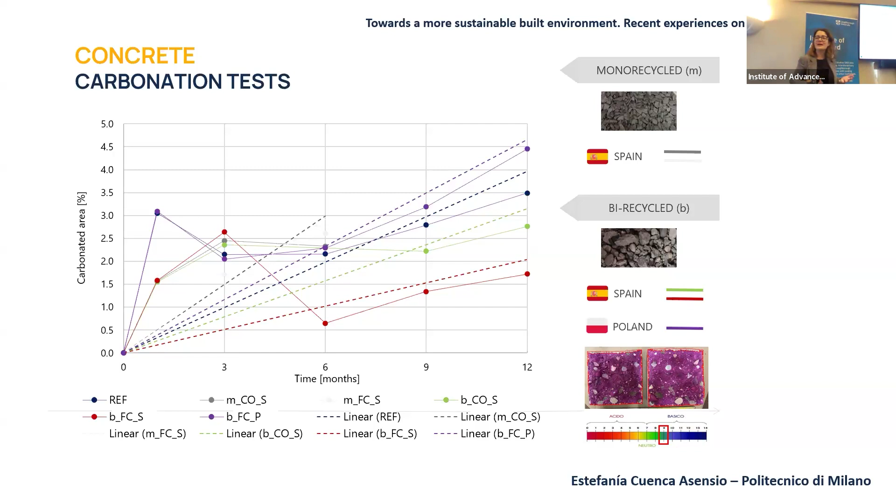So the experience was quite good, was satisfying, because it's possible to use a B recycled concrete with properties that are really interesting in terms of chlorides, compressive strength, mechanical, and so on. And it's possible to produce this material using waste, because otherwise it's a huge problem how to manage this kind of waste. So this is our second experience.